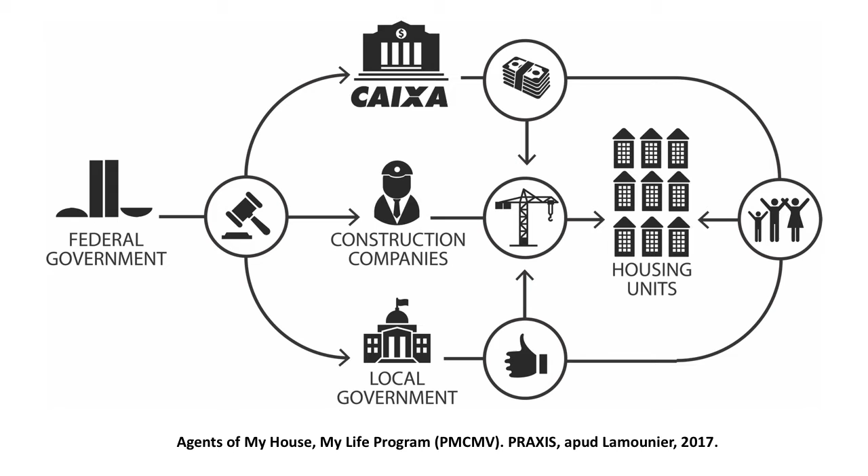Well, I will speak about my experience in research on Open Building in Brazil, especially during my PhD. This is the cover of my thesis, From Auto-Construction to Open Architecture: Open Building in Brazil. It starts from the non-participation of the dweller in the decision-making process and the non-spatial flexibility related to the public production of social housing in Brazil, which nowadays is performed by an excluding state-market partnership.

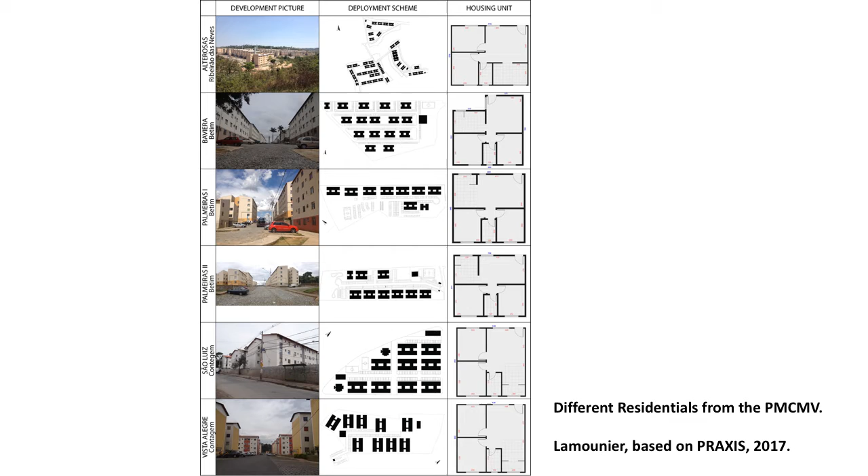The federal government, the developers and builders are the predominant agents, and people don't participate in this decision-making process. Millions of housing units have been built. They are standardized, rigid, and repetitive spaces, both in terms of dwelling and building, and the housing deficit remains. This production is inadequate to the needs of the families, and at the same time it is insignificant compared to the predominant housing provision carried out by auto-construction.

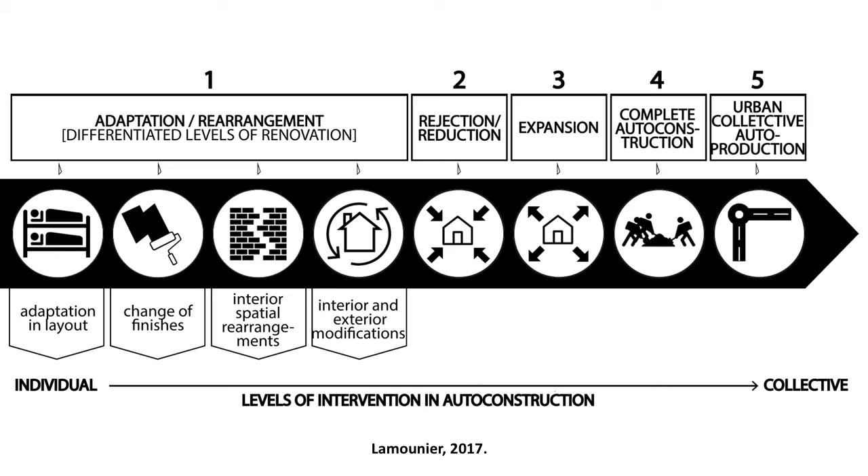The vast majority of Brazilian dwellings are built, enlarged, or renovated by dwellers themselves. When this practice includes reforms, its percentage rises to 85% in all parts of the city, slums, favelas, or peripheral areas. Despite these difficulties, auto-construction generates solutions that better serve the everyday and domestic lives of different families.

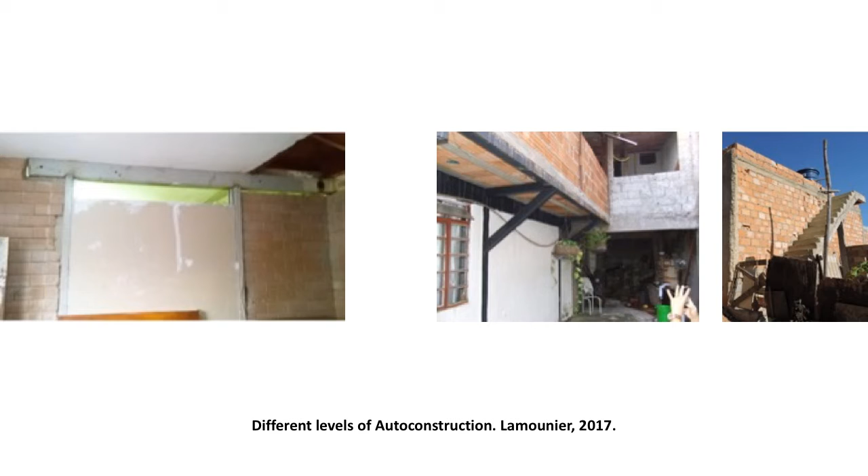Surely the autonomy present in this practice is what guarantees power in decisions. Thus, it is precisely autonomy, dwellers' freedom to produce for themselves, as opposed to heteronomy, subordination to that produced by others, which auto-construction offers and that positively differentiates it from the public business production.

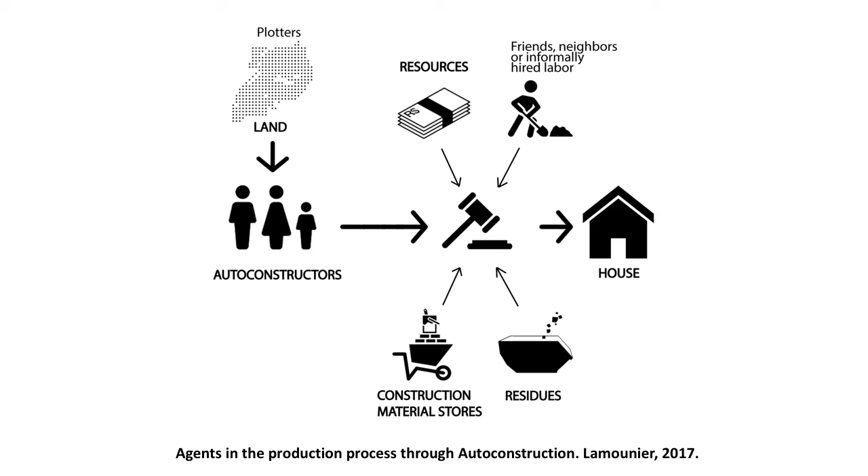Given this situation, the research investigated the relevance and feasibility of another practice, choosing for that the support theory from Habraken and open building, whose assumptions are reconstructed from the conditions of Brazilian production, to set up as a counterpoint to that public-private production, as a way of reconciling it with auto-construction's advantages.

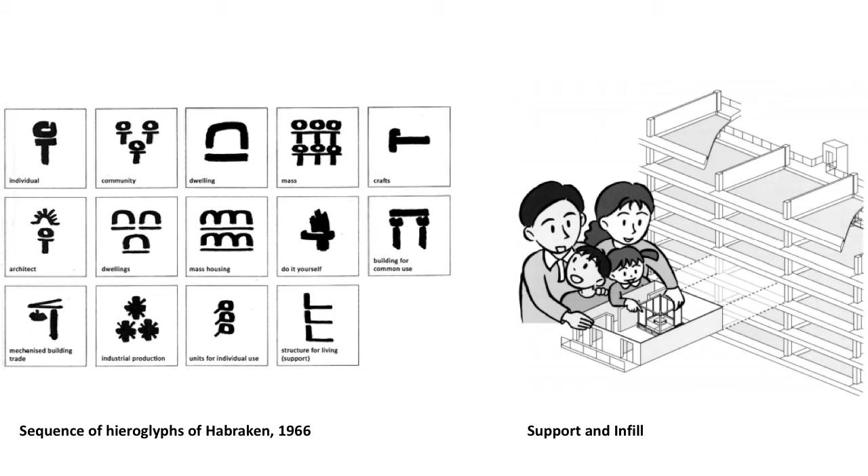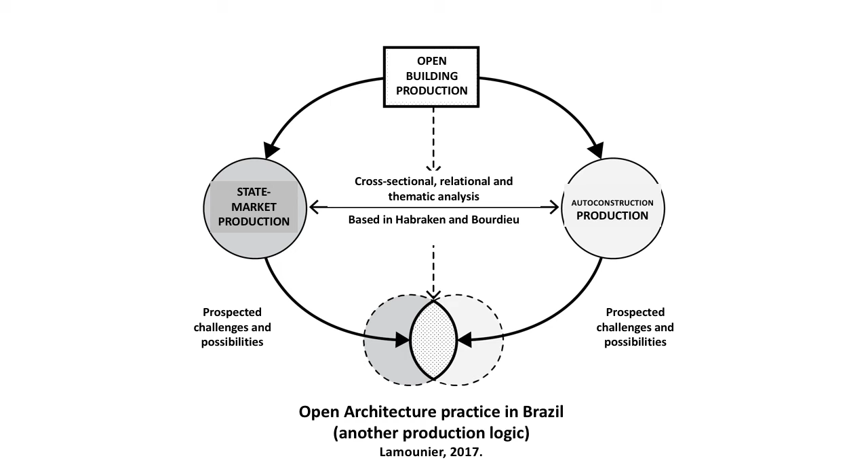It was elaborated a cross-sectional, relational and thematic analysis of two Brazilian production universes, crossed by the dialogue with Habraken's theory and in light of Bourdieu's sociological theory: field, capital, and habitus. From the results of the analysis, the study develops an architectural prospection as a counterproposal for this development shown on this slide.

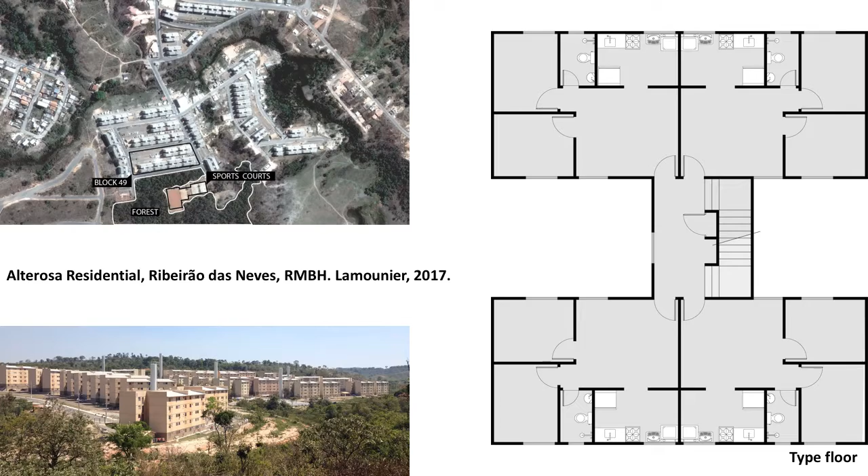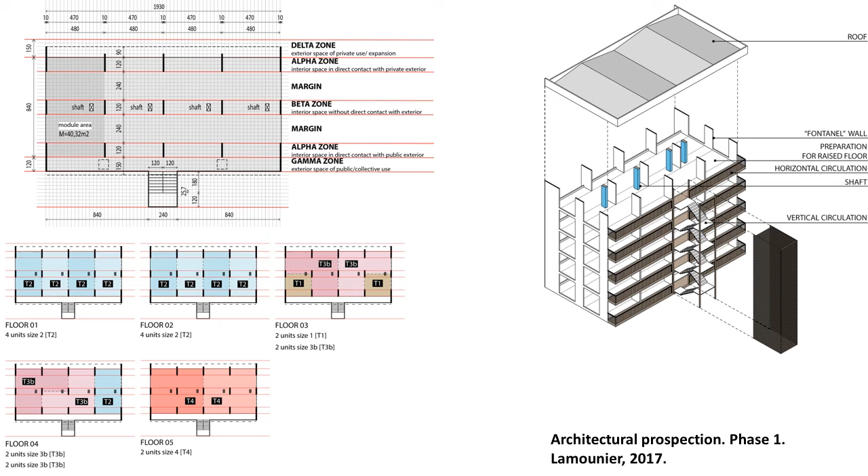Alterosa Residential in Belo Horizonte metropolitan region. On the site, there is just one architectural type for these almost 13 family compositions in terms of number, gender, degree of relationship, and social relation. In order to demonstrate the demand for spatial flexibility and for empowerment in the decision-making process regarding the space itself, many field research results, similar methods, and similar projects were considered: Habraken's theory, building layers of Brand, and the Flex method about adaptive capacity from Geraedts et al.

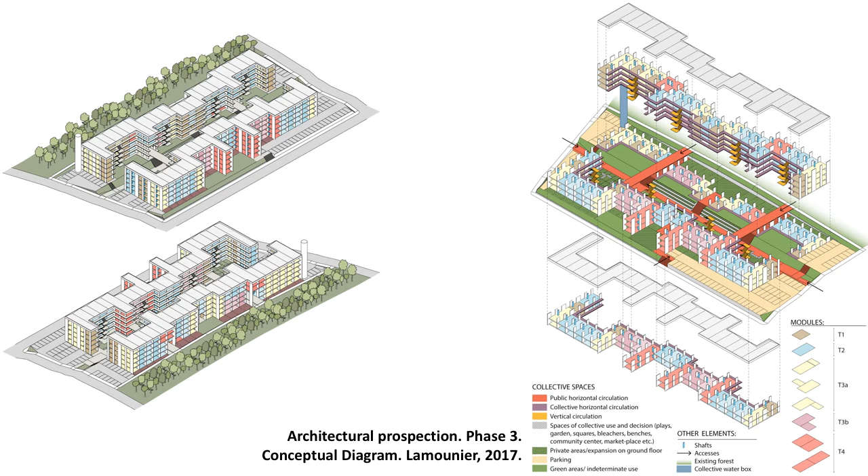That prospection demonstrates, under the design, constructive, technological, economic, financial, and management aspects, the feasibility for those who produce and the accessibility for those who acquire dwellings produced under the principles of open building. Three types of costs were calculated. Option 1, a complete proposal with a full budget as if a construction company were contracted, 11.73% higher than the work performed on site.

Option 2, without cost with a construction company for the infill, presents 5% cheaper. And option 3, 10% cheaper, similar to the previous one, and still eliminating the internal walls in order to offer minimal conditions of habitability. Besides guaranteed affordability, in the last two alternatives, more families could benefit in better locations, infrastructures, neighborhoods, and so on. The argument here is that from auto-construction, the practice of open architecture in Brazilian social housing becomes more economically and socially feasible than that produced by the market-state.

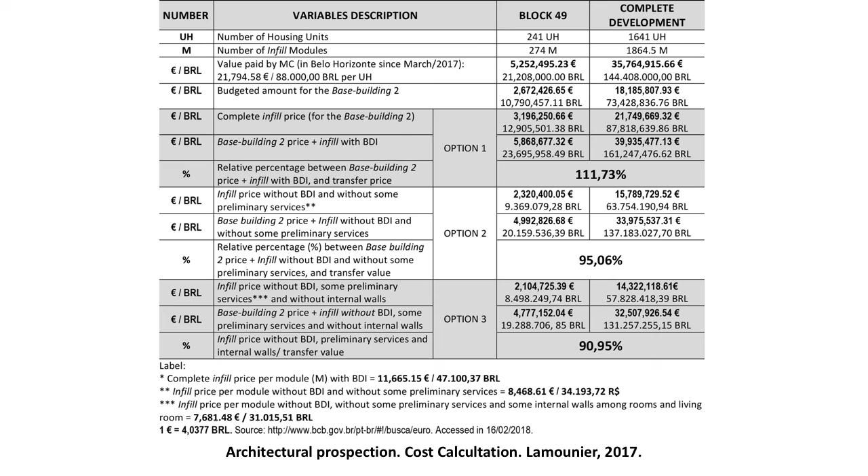Based on the distinction between the levels of decision making, collective support, and individual infill, of physical nature, but also social and political, and defined by the support theory, the open architecture proposal solves at once and in an independent way the problematic of the negative double initially highlighted. Nowadays, we are continuing research about these possibilities, focusing on their technological aspects. We already presented these papers in some conferences.